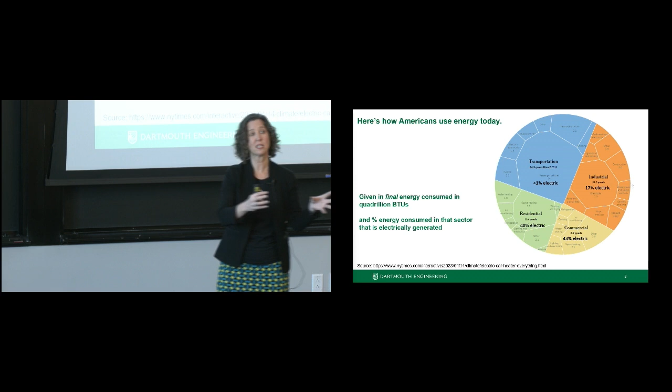This idea that if we can start generating electricity with renewables, could be solar, it could be wind, it could be even nuclear, so clean electricity. If we can generate more and more electricity cleanly, then we're going to need to make sure that these different sectors run on electricity more. And I put on here the percentage of that energy consumption today that is electric.

So this is today. So residential, 40% of the energy consumption in your homes comes from the wires that are connected to your houses. It's about the same in commercial. It's a lot less in industrial. And even though you see a lot of electric cars out there, it's really not very big. It's still just about 1% or less of the transportation industry, because we're talking not just cars, but trucks and buses and all of that. About 1% or less is actually using electricity today.

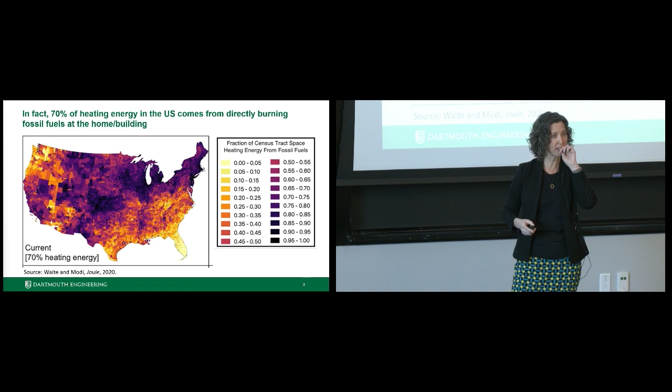And if we dig in a little bit more, what this is showing you is a map of the US, and specifically heating, right? You think, well, what are the other forms of energy that are being used in buildings? Well, if it's not electricity, you're burning fossil fuels. I'm sure many of you use natural gas to burn in your homes, and that natural gas burning releases carbon dioxide into the atmosphere, which then leads to climate change.

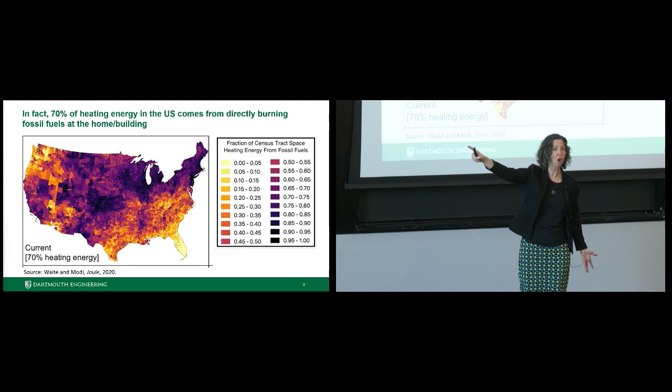And in fact, when you think about heating in particular, about 70% of the homes in the US are burning fossil fuels in the home and releasing that into the environment. So if we believe this premise that we need to electrify everything, we need to move from this 40% or so electrification in our buildings to 100% or so. Gosh, somehow we're going to have to take that 70% of the fossil fuel burning and turn that into all electric, right? And that is an immense challenge.

Also, what else inside of a building, a home, burns fossil fuel directly? Your water heaters. If you've got gas heating in your home that you're burning to heat, you're probably burning it to heat your water as well. You probably have some cooktops, right? And you probably have gas, natural gas coming in for that. Tends to be a small percentage of the total energy use, but still. And all of that is going to have to turn electric, and be clean electric, in order for us to stop releasing CO2 into the atmosphere.

I'll just go back. We're going to focus more on the building side, but look at the huge challenge we would have in industrial, right? At 17%, it's actually really hard in the industrial sector to move from burning fossil fuels to electric. A lot of that has to do with high temperatures that are needed in order to achieve some industrial processes.

Transportation, we're on our way. You see a lot of companies out there that sell electric cars, right? There's a lot more interest from consumers in electric vehicles, but having the impact on the aviation industry, on buses, on shipping, on all of that, that's going to take some time. So we still have a lot in front of us in order to get to this point where we're able to electrify everything.

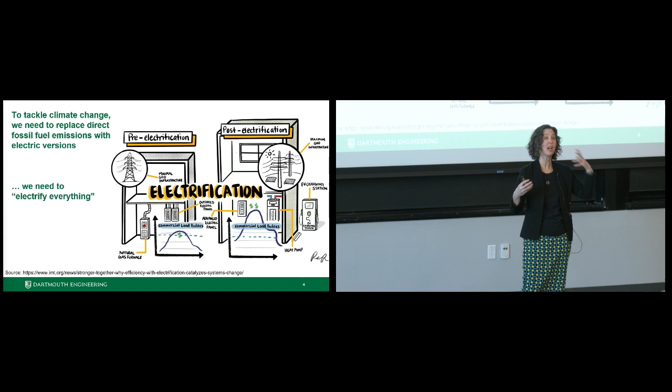And I should also mention too, right, now where the building, your home, you were concerned about heating, water heating, space heating, maybe some cooking, burning fuels. Well, now you're actually plugging in your vehicle. So a place, the home, which didn't have a high electricity load, now all of a sudden does. So we've got to think about this.

We've got to think about, okay, if electrifying everything is the way to go, right? There are lots of great, smart people thinking about how to get more solar and wind and nuclear and hydro on the grid. That's great. Some of that's centralized. Some of that will be distributed. That's great. Now, we, building people, have to think about what could that look like? When we think about the deployment of various different technologies that influence the building industry, the costs, the policies associated with all of those things, right? How might things look? How might things change into the future?

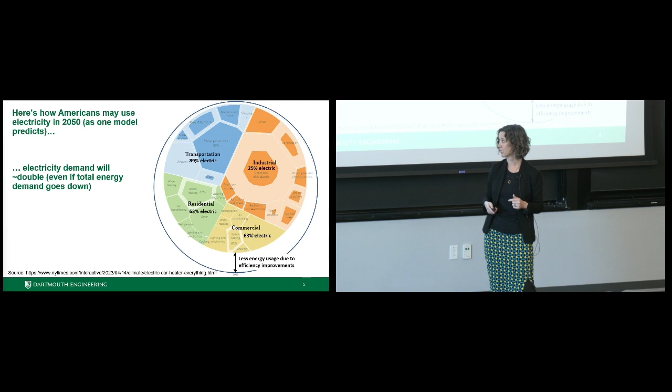And all of you should understand, and if you don't, I want you to think about it and absorb this, right? The greater the difference in temperature between the outside and what you want the inside to be, the more energy it's going to take to reach that temperature on the inside. So in a place like Boston, or where I am, Hanover, New Hampshire, where it's about 10 degrees colder than what it is here usually, right? It takes a lot of energy to actually heat the buildings that we're in. As you get to warmer and warmer climates, right, it takes less and less energy to do that. And again, most of that energy is coming from fossil fuels.

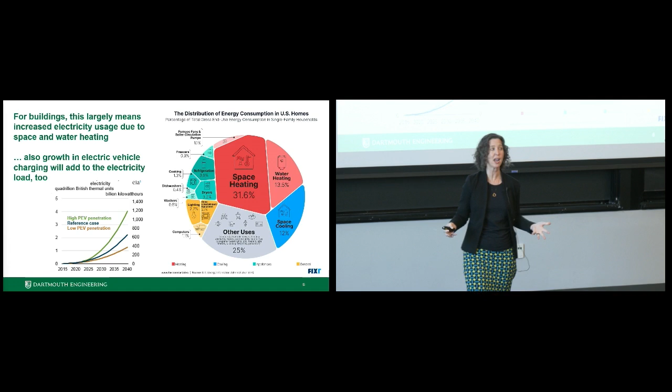And then I mentioned too, we also have to think about electric vehicles. This is a graph of how much energy electric vehicles are expected to use over time. So this is a projection, right? And there's a high case, a reference case, and a low case, depending on the assumptions you're making in that model, right? And so that is going to go up significantly over time. And so if you think about that, again, you're going to start paying a lot more on your electricity bill as we move in this direction.

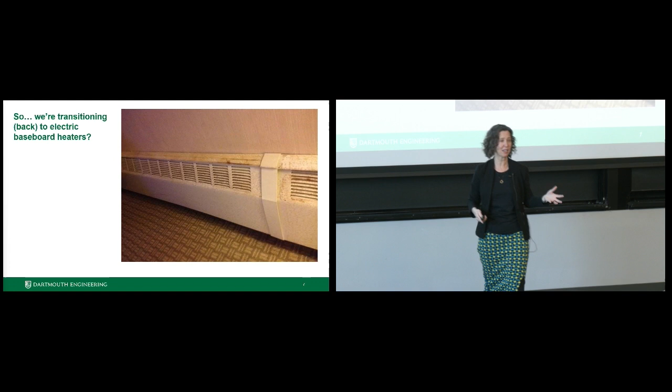So we've got to replace our fossil fuel burning furnaces with something electric. Is this what we're talking about? How many of you in the audience either have something that looks like this in your home, or have been in somebody's home where you've seen something that looks like this? Yeah, right? These typically are electric baseboards, right? And they really are electric, and you think, oh, well, that's great because we're moving toward electrification, and hopefully the electricity that's feeding that electric baseboard is coming from some solar power somewhere, and so it's green electricity. Okay, maybe that's okay, but actually that's not what we're talking about here.

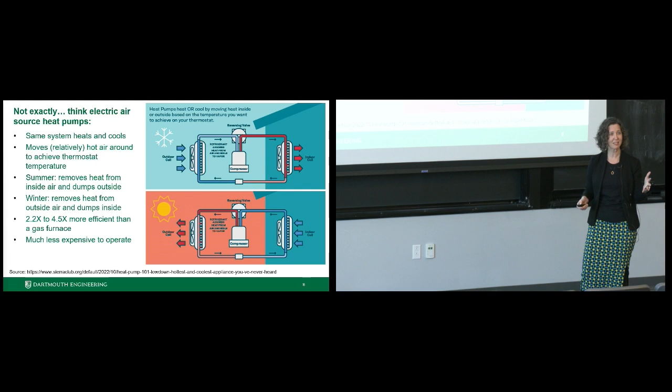And for those of you who maybe are studying mechanical engineering, right, you know this is a standard refrigeration or air conditioning cooling cycle, where you've got your compressor and your condenser and your evaporator. And again, all you're doing is moving this refrigerant through this cycle. I won't go into thermodynamics, even though I really want to, but I won't. If it's the middle of winter, no matter what the outdoor temperature is here, this refrigerant is colder than that. And so this refrigerant actually absorbs the heat from 30-degree weather. It's absorbing the heat because this is at 20 degrees. And so it's absorbing the heat and bringing that through the process, and then once it gets heated up a little bit more, dumping that to the inside of the house to heat the house.

And the same thing happens, those of you I'm sure have had window air conditioners at some point, right? And actually what's happening is the air inside the house is running through the air conditioning system. The heat is being drawn out and that's being kicked out into the outside, which is at a hotter temperature. So that is a way then to kind of grab heat, which is existing in the atmosphere, and use it to actually heat, or if it were the other direction, cool the space. So it's a very efficient process.

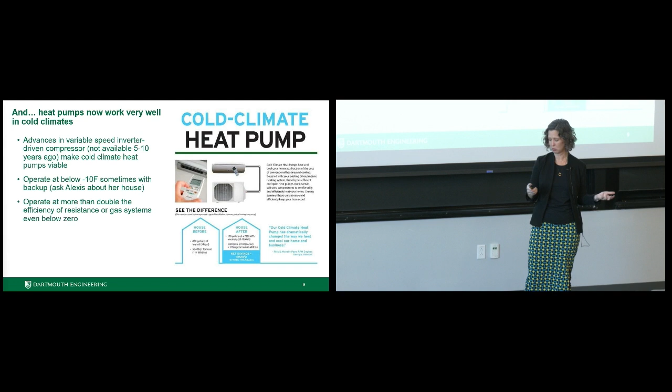Some improvements in the compressor, in the refrigerants that were used, are now making it much more viable and relatively inexpensive to put a heat pump for heating purposes in the coldest parts of the year. And when you think about it, right, at the end of the day, putting one system in, well, that's cheaper than putting two systems in. This is just a picture of sort of the energy consumption in a building under 4 different conditions. So this is a building without air conditioning, with your typical air conditioning, with high capacity, so even high efficiency air conditioning, but then one with a heat pump that does both heating and cooling.

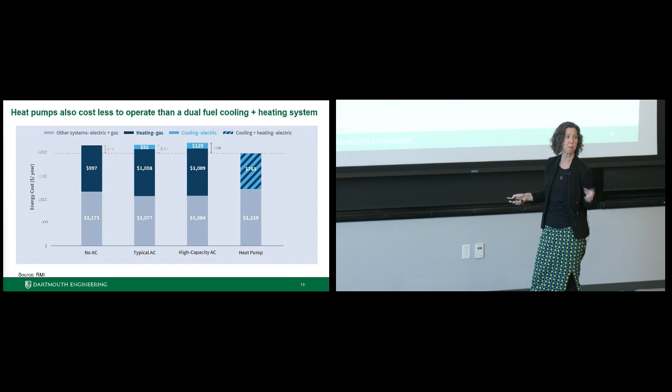And so, the light gray bars here actually are kind of the electricity or gas cost, depending on what's in the home, to just run everything in the home. And then the heating and cooling is everything above it. So you see it's about 50% or so is used for heating and cooling. And so obviously if you have no air conditioning, right, you're not paying for that, the light blue. If you have a typical air conditioning system, then

this is, and I think this is the average home in the US, then you're paying something for heating, a lot for heating, because again, you got a big delta T, a big temperature difference, and you're paying something for cooling. Great, you want to put a more efficient system in, that's great, that helps you, but then if you put in a single system that does heating and cooling with just that reversing valve on it, then the operational costs of your energy each year is much less. And this adds up, obviously, over time.

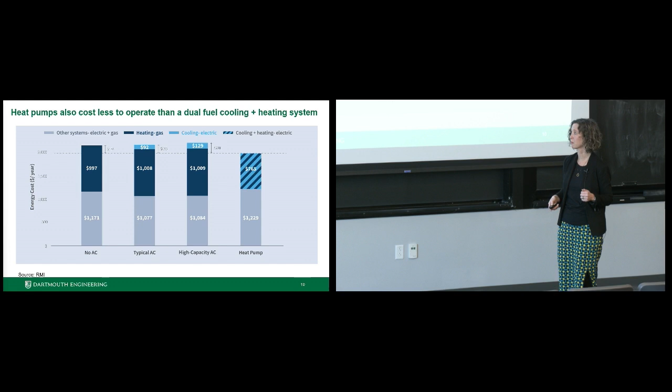Okay, so I've just described to you this wonderful future ahead of us of how we're going to electrify everything, and it's all going to work out. We've, of course, got to hope that and strategize and plan and put policies in place and think about economics and make sure the technologies are there to make all those energy generation sources clean and green. But we also have a problem because most of what I've shown you so far is the average for the US. And as you know, right, we can't just treat every problem as an average, especially when you look at some of the outliers and how you might treat those outliers differently.

Well, that heat pump can operate, and let's say we size it appropriately so that even on those 5 coldest days a year, we're going to be able to meet the needs of this space, but we're going to have to run that heat pump 24/7, right? We've sized it such that it's got to work its hardest on the coldest days of the year.

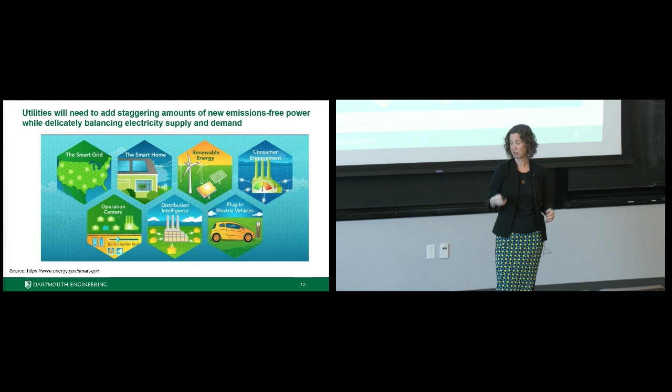Everybody's plugging in. That's a huge load on the grid that they never had to deal with before. So utilities are really nervous about this additional complexity as well as the additional load that we're going to see in the future. So how do we solve this problem, right? We've got to go figure this out. We are engineers. We're going to solve this problem. I have full faith that that will happen.

In part, this problem will be solved by looking towards energy storage. So that means using batteries, but as shown here, it also means using other types of storage. So during times when the wind is blowing and the sun is shining, we have all this electricity flowing.

Let's use that to pump water. This is done sometimes with compressed gas as well. But we could pump water essentially uphill. So we're going to use the electricity to pump water uphill. And then during those 5 days a year, we'll let that water fall down and kind of get our free hydro, if you will, electricity from it when we need it.

So a solution like that, or a solution like putting electricity during these times when the sun is shining and the wind is blowing into batteries is another option as well. You might be surprised to know that a lot of solar systems on homes, when they overproduce electricity, it depends what state you're in, sometimes you can sell that back. In Massachusetts, you can sell it back to the utility. In some states, you cannot do that. And the electricity literally goes into the ground.

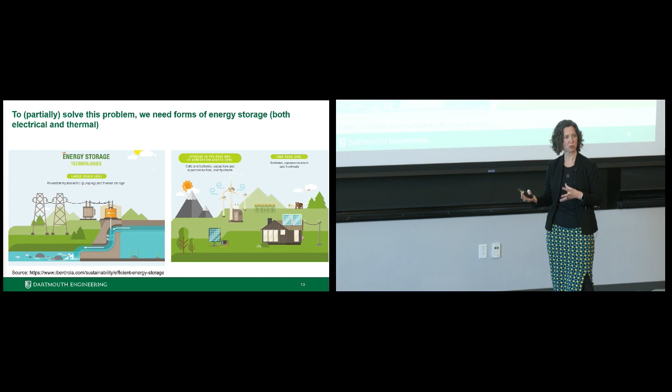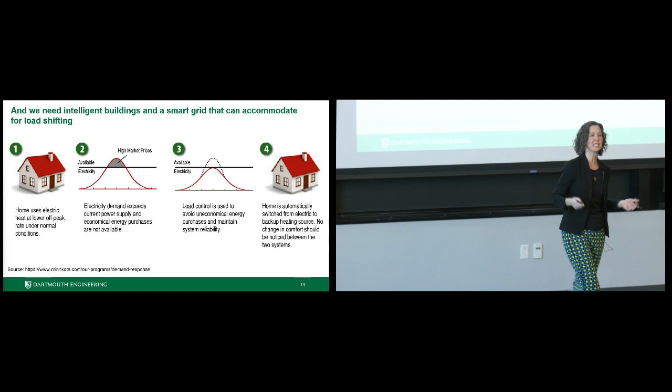So it's wasted. So we need to do a better job to figure out when there is overproduction, particularly from renewables, what we do with it, how we store it, and then how we deal with all this complexity on the grid to balance it. So what happens sometimes, and what will happen more and more in the future, is that you've got a home using electricity, and it's being charged 13 cents a kilowatt hour. That's fine. That's a pretty good price for electricity these days.

But when everybody gets home from work and turns on their ovens and their dishwashers and plugs in their electric vehicles and all the lights are on, and the kids are watching TV, what happens is you end up with electricity usage, that's the red line here, that is above the available electricity that the central power plant, maybe plus your own solar, can give you. So oftentimes if you've been in a brownout, that's sort of what happens. More people are asking for electricity than we can give them. And so we have to reduce essentially the voltage for everybody so that we can try and do the best we can to deliver that electricity. So that's what utilities do.

So what happens in certain parts of the country, and will continue to happen more and more, I believe, is that once it's looking like the electricity demand will be higher than what's available, then the utility will start charging you more for electricity. And we've seen this happen in a very organized way. California has a whole system to try and deal with this. We've seen it happen in places like Texas when they had a really bad winter for a very short amount of time, and electricity prices and fossil fuel prices went through the roof and caught people off guard. So we're still figuring out how to manage that.

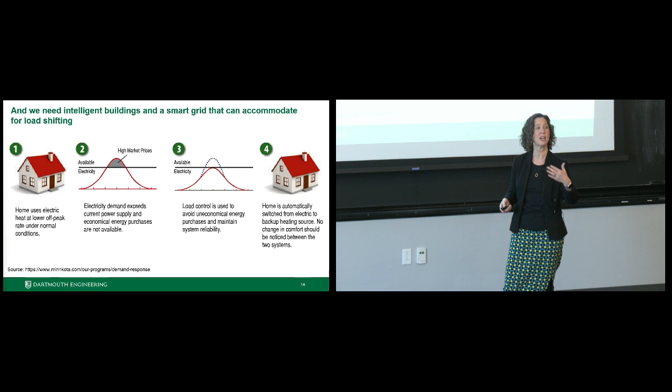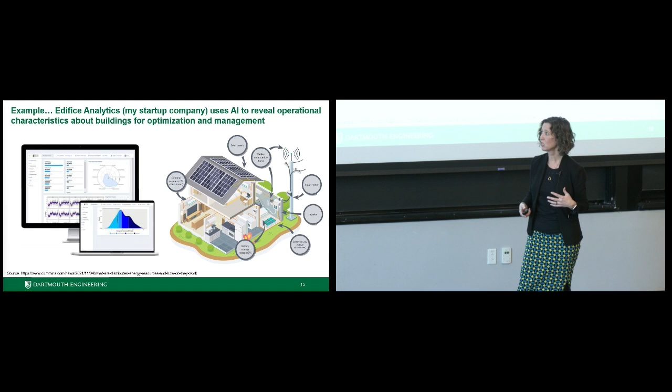I thought I'd throw in something here about the startup company that Dean Lee mentioned. Edifice Analytics is a startup company that I started with some collaborators at Case Western Reserve. And essentially, one of the things that the company does is take electricity data that you're sending to your utility anyway, and through data analytics and AI analysis of that data, figures out what might be going on in the home.

So an example is Starbucks has been a partner of ours, and they give us 50 data sets of their whole building electricity use. So their electricity usage in the whole coffee shop, not on individual things, over the course of a year. And because of the work that we've done, we can then pull out what the refrigerator uses, what the ice maker uses, and tell them what that load is. If they wanted to, they'd have to go in and sub-meter out the different refrigerators and ice makers in their coffee shops. They could do that. That would cost money. They could send in somebody to do a physical energy audit. They could do that. That would cost a lot of money.

Or they could just give us their data and we can tell them what's going on in their building. So Starbucks is very committed to sustainability, for example. And so they're very interested in knowing, are there coffee shops where their refrigerators and ice makers are using too much energy? Right? And those are the coffee shops they'll want to go in and replace the refrigerators and ice makers and put in ones that are much more energy efficient. And so we can do this.

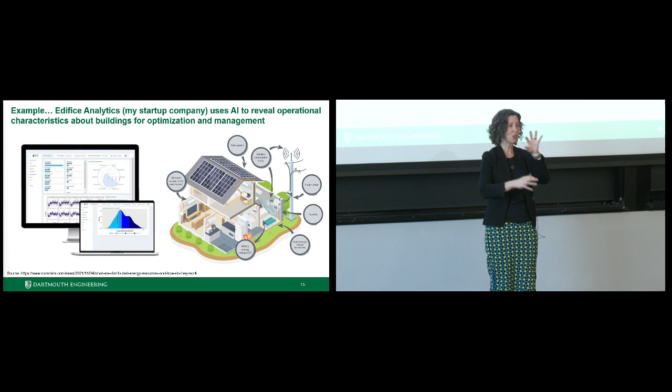Wouldn't it be great if you didn't have to think about the fact that you might be charged for peak prices, and instead you have a system in place that's managing for when the solar goes to the battery, when the solar goes to your house, when your electric vehicle actually gets charged, when it doesn't, when the dishwasher runs and when it doesn't, right? That your thermostat might go up a couple degrees, might go down a couple degrees. You set the parameters, but the system itself, using intelligence, can go in and actually manage that for you.

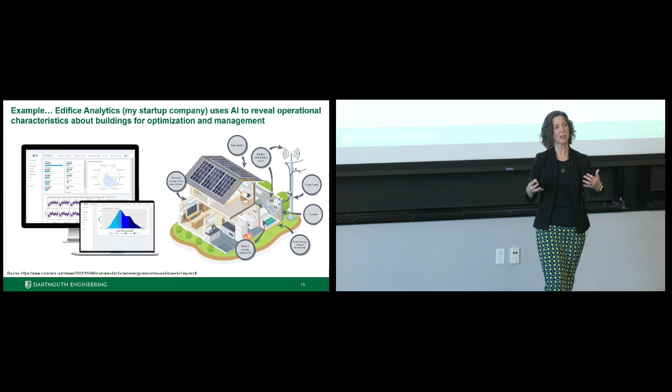So going back a bit, though, we're still kind of stuck on this idea of those 5 days a year in Boston and how we deal with them. And I don't have all the answers for you. I do know we aren't going to make the grid 4 times as big just to deal with those 5 days. So we got to think of some creative solutions here.

One I'll put out here is, well, we might need some backup fuel just for those 5 days. I don't know, maybe we leave the natural gas furnaces still hooked up just to run occasionally. You don't have to put in as big of a system maybe if you have new construction, but maybe we decide it's okay to burn fossil fuels for 5 days a year to heat our Boston homes and buildings.

It's a little bit of a wacky idea, but this idea that if you can generate some clean energy and go through an electrolysis process and create hydrogen, then that's clean green hydrogen, and actually deliver that to a home or a building. This isn't unlike what happens in some parts of New England, like where I am, where there's delivery of propane and delivery of oil. We don't have natural gas.

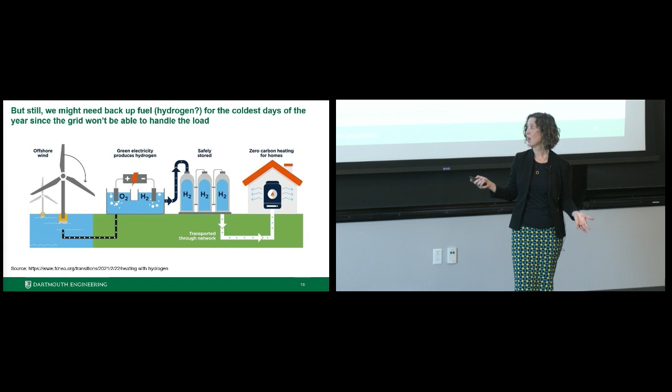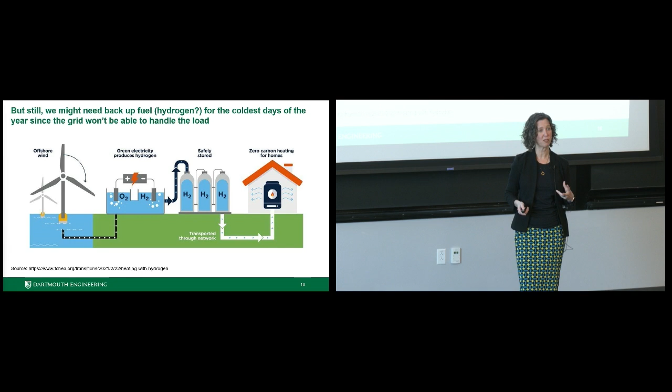So delivery of hydrogen, not a huge tank, just one for 5 days a year, that then connects to your system and can then be used, right, on occasion for that backup heating, right? Hydrogen's very expensive. There's a lot of effort to reduce the cost of hydrogen, and yet at the same time, on those 5 days, I think we'd be willing to pay for it.

Right? This is going to take many students who are learning these concepts today, who turn into workers in the workplace, who are thinking about energy, who are thinking about technology, but who are also thinking about economics and policy and all of these things, to be able to put that all together to really have an impact, to solve a lot of these complex problems that we talked about today.

So with that, I'm happy to take any questions that you might have.

I don't have a cool, sorry, walk-around mic, right? So I have to use this mic.

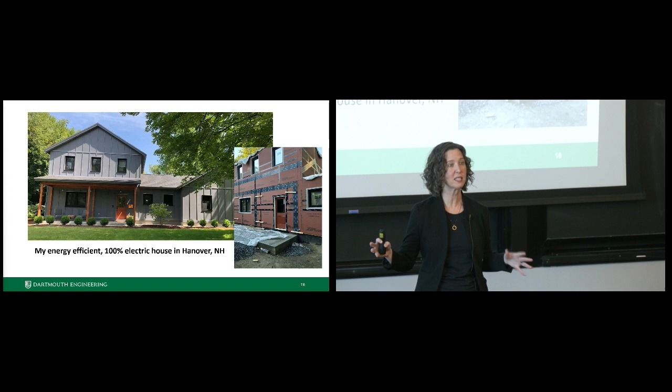New construction is the best time to really think about energy and energy efficiency, and to really spend the extra money if one can. There's great rebates and policies out there, particularly through the Inflation Reduction Act, which is the biggest climate bill that this country has ever passed, but nobody knows that because it's called the Inflation Reduction Act. So lots of opportunities to take advantage of that.

When you're talking about a retrofit of a building, you've got to ask the question. You probably have to bring in some people who can help you navigate. How old is this system? What are the benefits of maybe changing out the system and putting in a new system if it's not broken yet? Is it still better for me to do that?

I guarantee you a 1970s, 1980s refrigerator, it is worth the money. The payback is probably 18 months. So please go tell everybody you know with those old refrigerators that they should swap them out because they're paying more to run them than they should, and it's bad for the environment. So it's really an investigation.

I mentioned Edifice Analytics, right? This is one of the reasons that we got motivated to do what we do. It's really hard to know what to spend money on, what to invest in, particularly in old buildings. And so being able to do some kind of analysis simply, quickly, to have insights, to know what to change out, is important. But unfortunately, the answer depends on the building itself. Yeah. I may have to follow up with some offline questions.